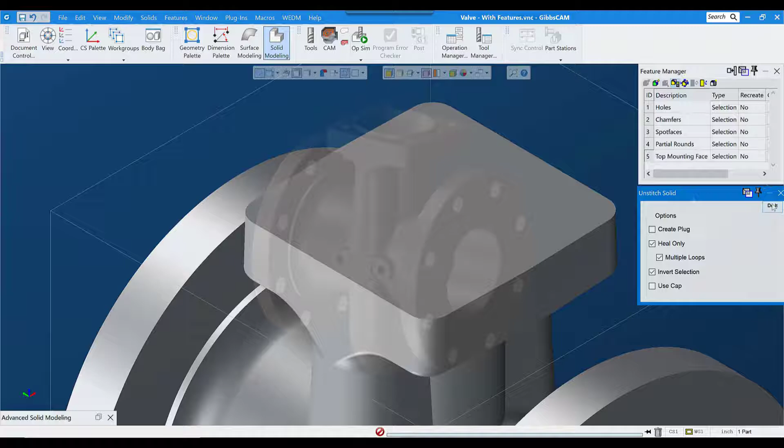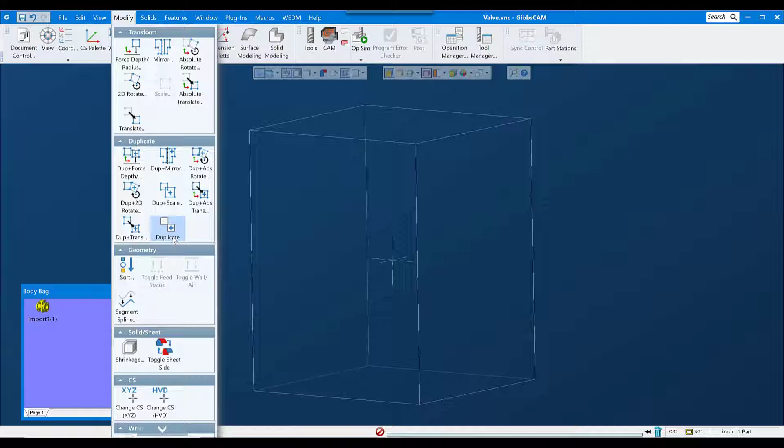The shortcut key for duplicate is Control D, and that gives me a copy of whatever was selected when I duplicated. I'll leave the original model in the body bag and leave it alone, don't want to change it, and I'll modify the copy. Now under Solid Modeling and Advanced Modeling, the fourth button over is Unstitch Solid.

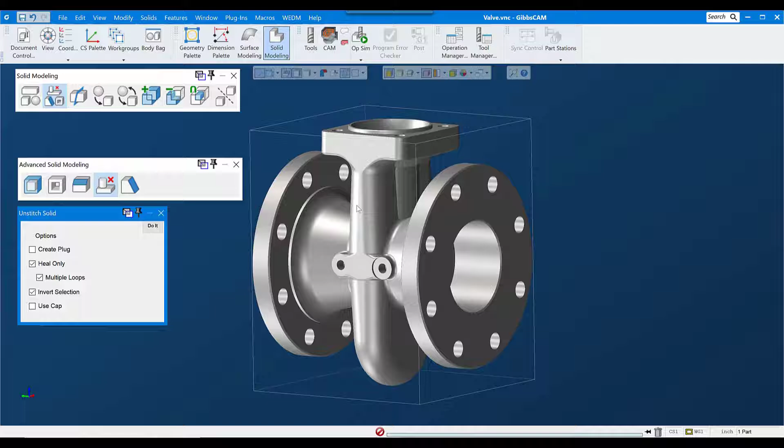Unstitch Solid allows me to remove features from a model. And there's two modes I can use, especially for holes. The first is Edge Selection. If I turn edges on, I can select the top and bottom edge, or really any edges in a single void that break out of the model, that break out into open air, and click Do It.

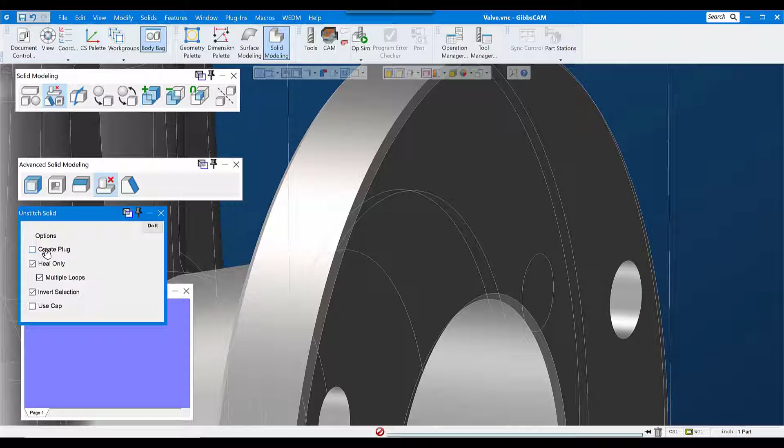Now notice that there is a Create Plug choice here. If I turn that on, there will be a negative of the space that's filled in created, as well as removing that space from the model. So here's a plug that represents the negative of that hole. Typically you would use this for core and cavity or some other situation where you need the negative of that void. Generally speaking, I'm going to leave that off for work like this.

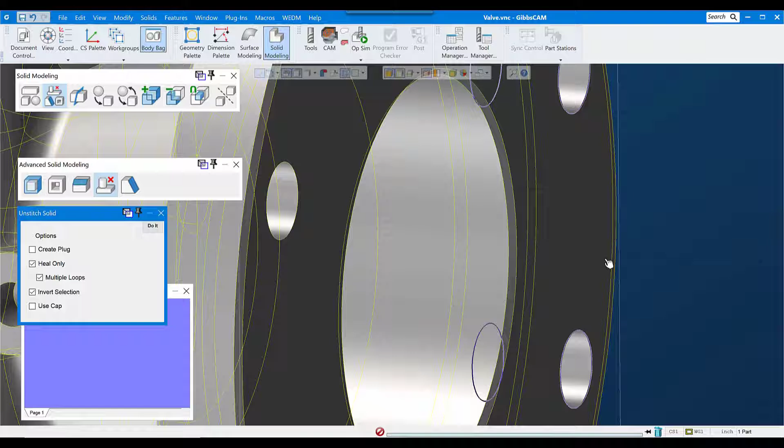The limitation to selecting edges for unstitching is that I can only do one void at a time. If I try to do multiple voids, I get a message saying edges split body into more than two face sets. So I'm limited to one edge set at a time.

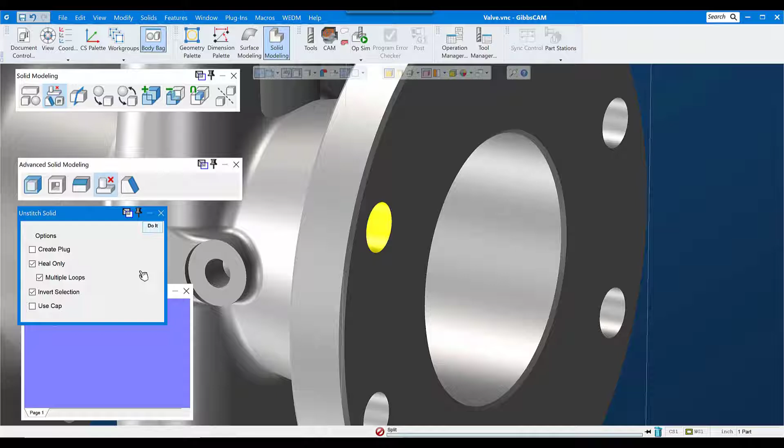Now the other mode that I can use is face selection. Face selection allows me to simply select all the faces that make up that hole, and on simple holes like these, this is probably the fastest, easiest way to do it. I get the same result as with edge selection, with the exception of I can select multiple holes or multiple voids at one time.

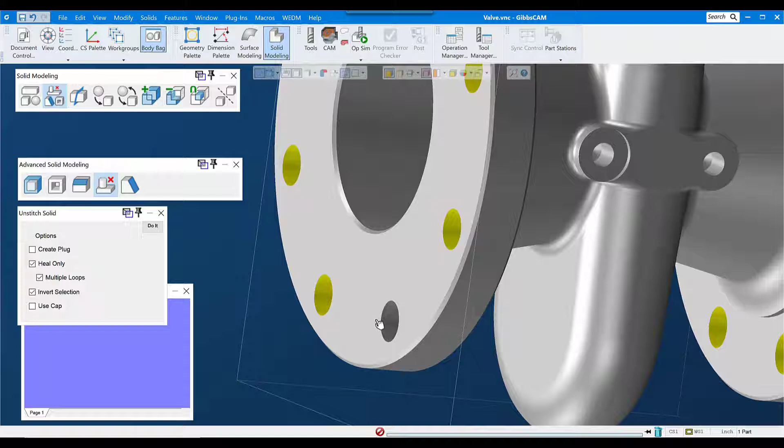But you need to remember that I have to select all of the faces that are part of that hole. So on simple holes like this, it's fairly easy and straightforward, but on more complex holes, it can be time consuming or difficult to get all those faces selected. We'll go ahead and remove these holes up here while we're at it.

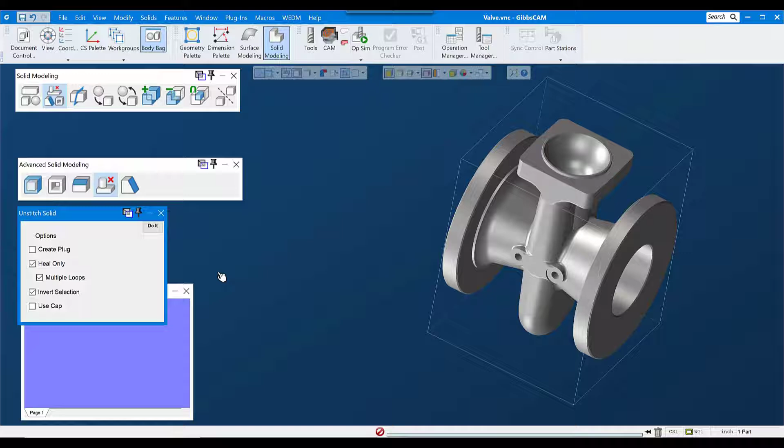Another use that I can put Unstitch Solid to is removing other features such as chamfers and fillets. As long as the software can merge the faces on either side of what you're unstitching, it will successfully unstitch.

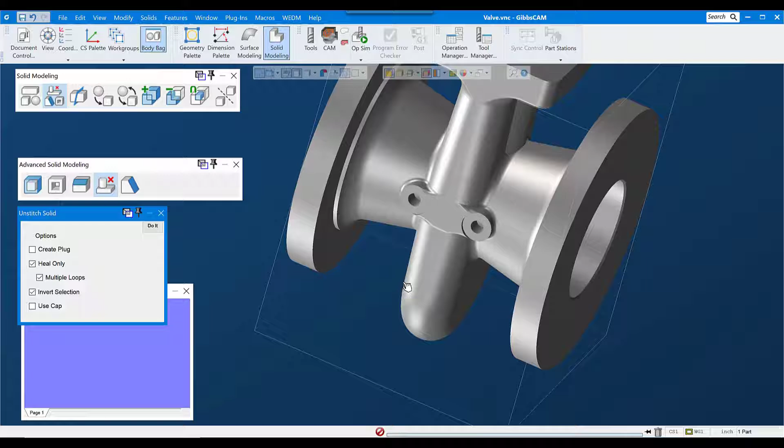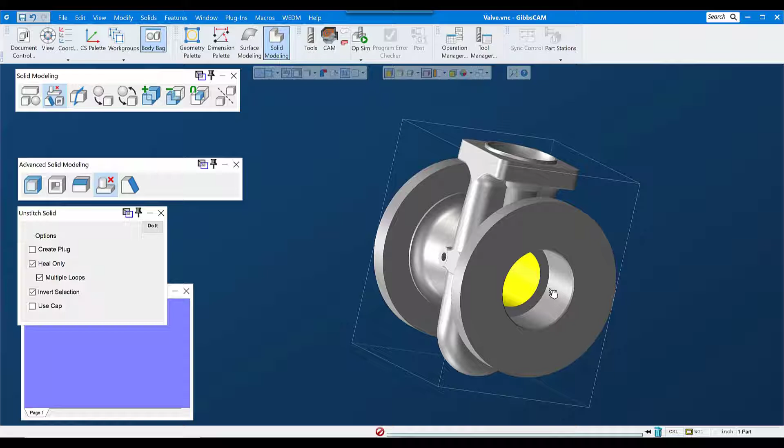Now, to remove this big cavity here, it's pretty easy to see that we have three places where that breaks out into open air, but in reality we have 5 because these holes also intersect that same void. So it would be a bit tedious and possibly difficult to reach all the faces that we need to reach to do face selection. So for this, I'm going to go back to edge selection and select the edges where this breaks out into open air. So we'll get the 3 big ones, as well as these 2 smaller ones.

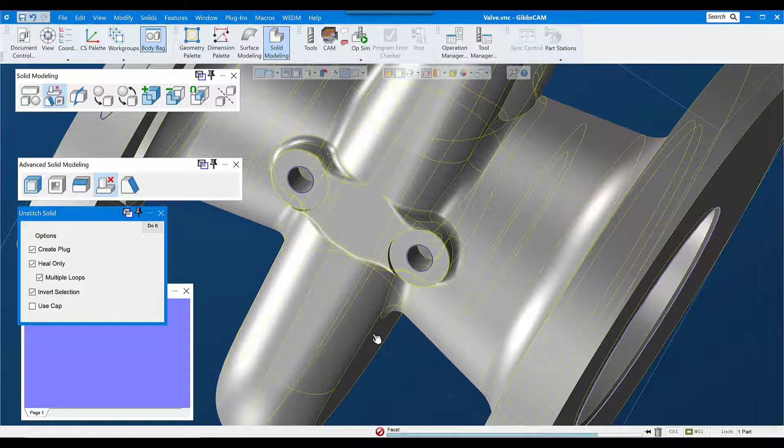And we'll unstitch that. Now in a situation like this, sometimes it's handy to turn on Create Plug, which can give us a negative of the space that was filled in, which sometimes is handy for making sure you understand exactly what's going on inside the part. In this case, it's really not necessary. I'll go ahead and delete it and bring our model back out.

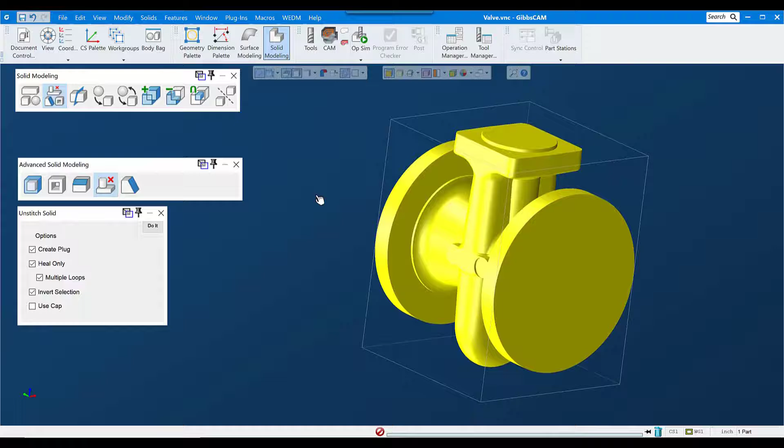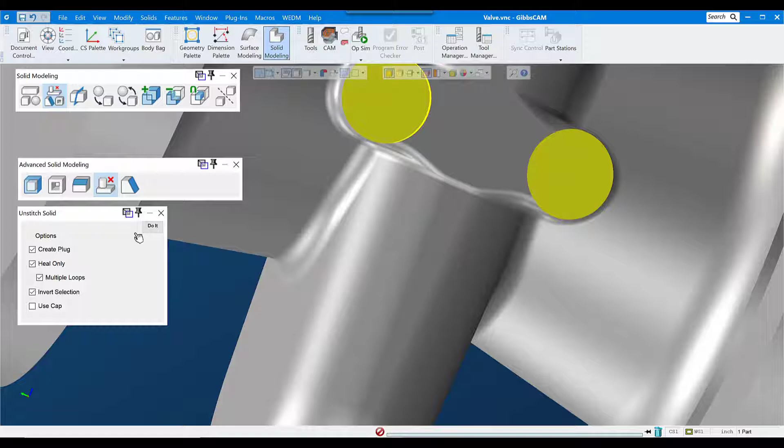Now, just one more thing, you're not limited to chamfers, fillets, and radiuses. You can also unstitch bosses and counterbores, spot faces, as long as the software can merge this face to the surrounding faces, it can successfully unstitch.

Right, I'm going to put this in the body bag, and I'm going to duplicate this part one more time. And I'll show you, I guess you could call it a trick, for selecting a lot of holes at one time. This is handy if you have a part that's got a lot of holes in it or more complex voids that need to be filled.

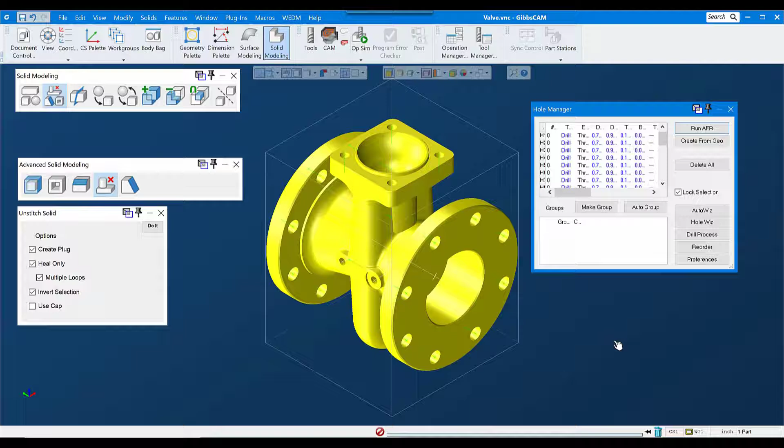And that is under features, using the hole manager and running automatic feature recognition to find all of the round voids in this part, which it has done, and I typically would auto group them, and I can go through and select a group at a time and unstitch those.

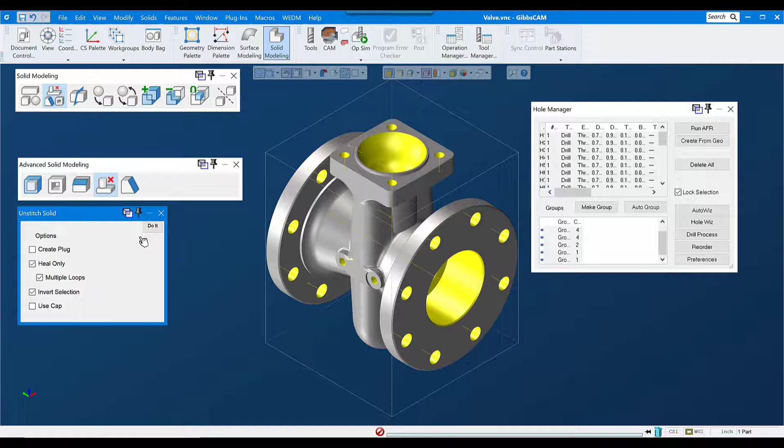Or if I know that I want to just remove all the voids from this, I can select the top through the last group, so select all of these groups, and while they are selected, I can just unstitch them all. I don't want to create a plug here. So that's a way to quickly select a large number of holes or voids at one time.

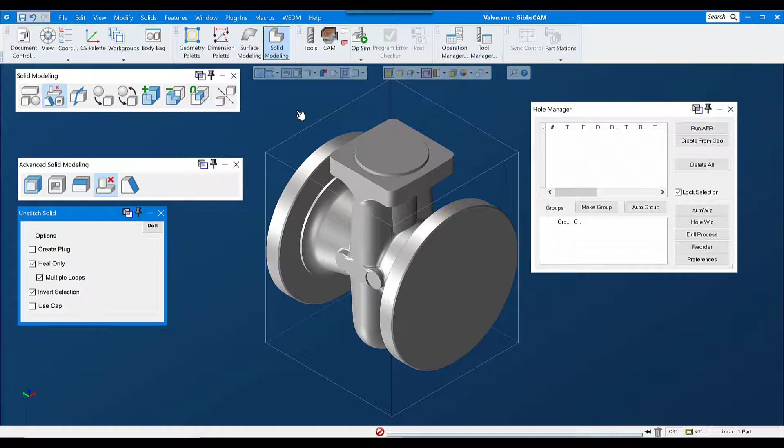In this tech tip video, we examined using the Unstitch Solid command to defeature a model. We might want to do this to create a stock body representing a casting or forging, such as what we were starting here, or representing a part with some of the features already machined in prior setups, or possibly to create a process model to make it easier to achieve the toolpath that we're looking for.

For instance, a 3D face that's got some small holes in it that we want to remove just so we get a continuous toolpath without the software paying any attention at all to the holes.